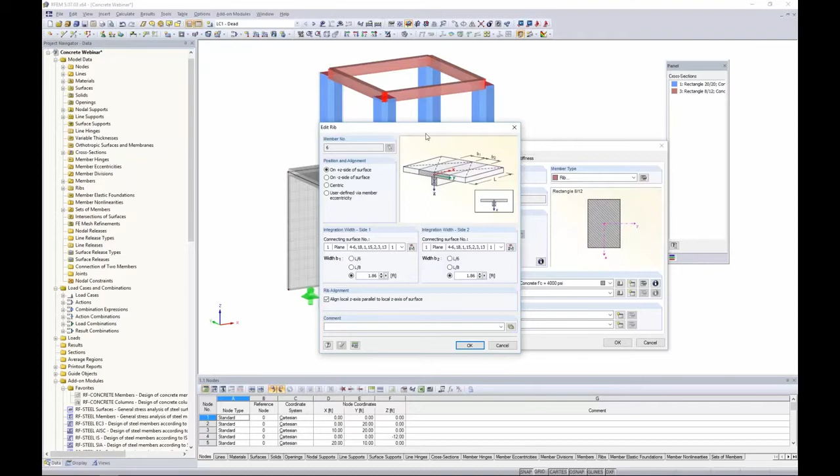And what's nice about the rib is that if we go into the edit member types here, we can define where to exactly place the orientation of this rib in comparison to the surface that it's related to. So we don't have to manually put in these rigid links to drop it down below the surface. The program will automatically calculate that for us.

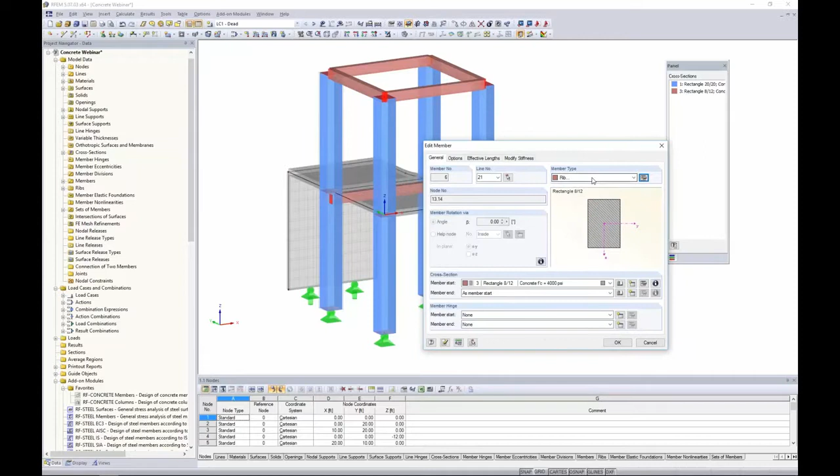Now what we can also do is automatically set the effective widths: L/6, L/8, or we can enter in some user-defined option here. So it's nice that the program does have this member type as a rib, which is used quite often for concrete members. So you can see here that I've already defined all of this criteria.

And the last thing to notice about these members in particular is that if I take a look at these columns, for instance, I right-click and I go to Edit Member. Under the Modify Stiffness tab, this is something that needs to be done for concrete members. Typically, the default will look like this, definition type none. And what you want to do when you are doing design according to ACI, you will see the drop-down here according to ACI 318-14.

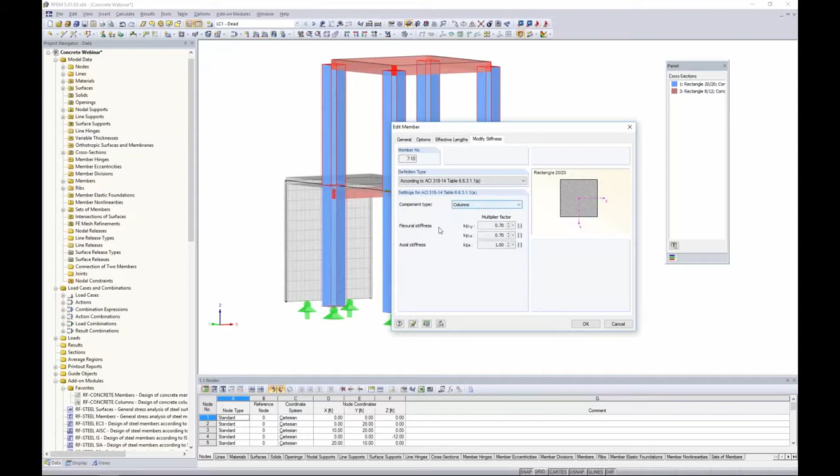If you click on this, this should look familiar. We have our component types: columns, walls, beams, and flat plates. Then you'll see these multiplication factors for our stiffness to take into account cracked cross sections. Anyone who's done concrete design, you're familiar with this. This is the way to take it into account in the program.

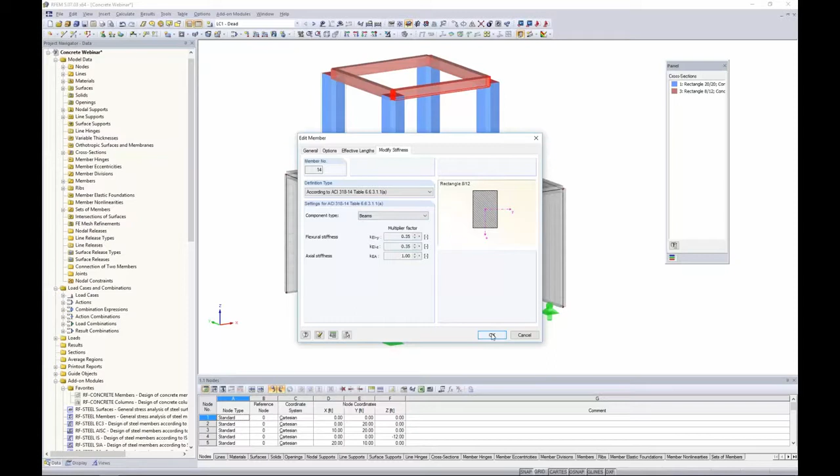And then obviously for our beams, for example, we have the exact same setting according to ACI, but I've selected the beams here. Now this multiplication factor will be slightly different than what it is for columns, which is why we give you this other drop-down box to define the element. So remember to do so for your concrete design. This is not done in one of the modules, but it's actually done in RFEM.

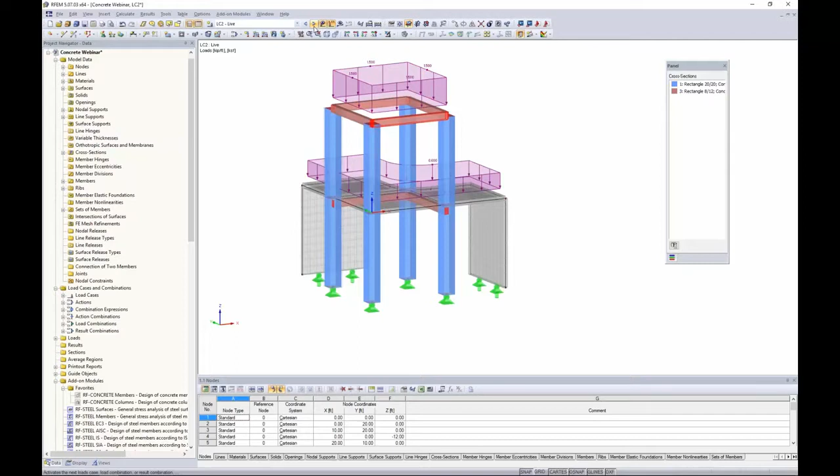The other thing to notice is that I went ahead and applied some loads here already. We have our typical dead load, surface load here. I put some line loads at the top members. Same thing for live load. And lastly, I put in a lateral load, wind load. I just applied it as a line load as well to what we can call maybe our first level diaphragm here, as well as our second level to these beams.

So we can also take a look at our different load combinations that were generated. If we go into our load cases and combinations dialog box, we'll see here our different load cases: dead load, live load, wind load. But more importantly, we're interested in these load combinations. Now, the load combinations were generated according to ASCE 7. We have all of our LRFD load equations listed here, only applicable to those load cases that we defined. We also have our ASD load combinations listed here as well.

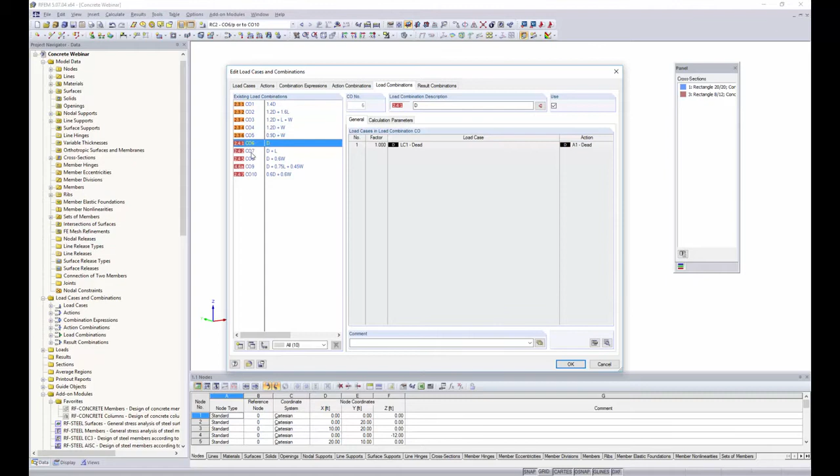Something to note, it is default in RFEM to run these load combinations as second order analysis, or P-delta. So you can individually change these if you'd like to something such as linear analysis or large deformation analysis if you have things such as cables. But for now, we want to keep it as P-delta effect so that we are doing our member design according to P-delta.

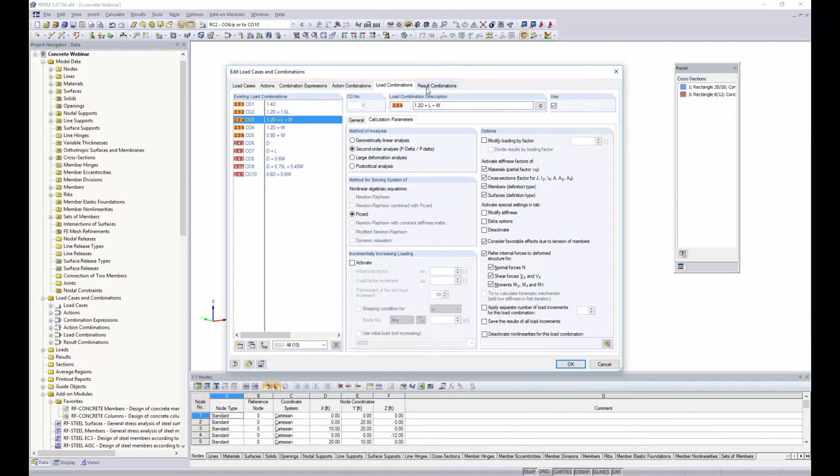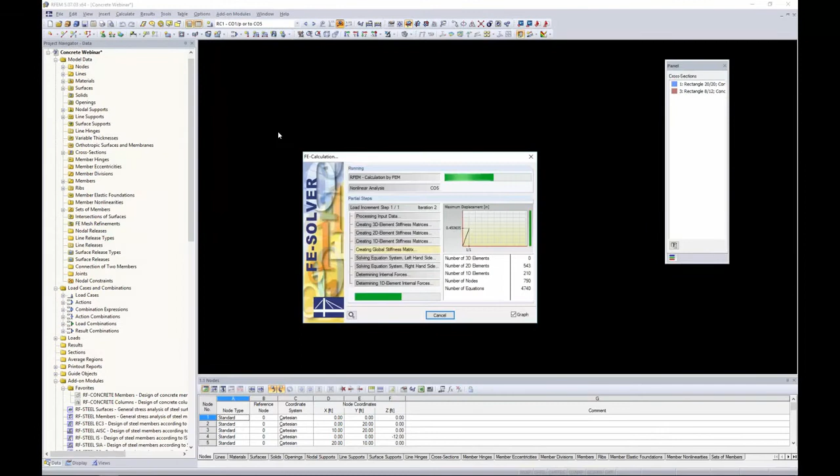We also have the results combination. This is nothing more than an envelope solution. You can see that we have the envelope solution for all of our LRFD equations and the envelope solution for our ASD equations. And with that said, we can go ahead and run our first analysis with our result combination 1. And you'll notice that this is nonlinear analysis. As I was saying, it's P-delta. It solves rather quickly, and we are given the envelope solution for all of our LRFD equations.

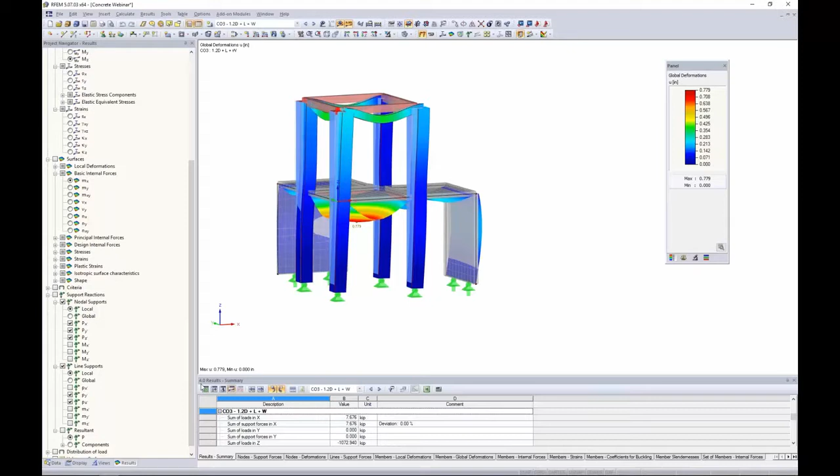Maybe I want to jump to something more like load combination 3 here, 1.2 dead plus live plus wind. We can see our deflection is given at 0.779 for our slabs. We have deflections of our members. So what I was telling you is that in RFEM, all of these analysis options are available in RFEM alone. Our results tab popped up here. This allows us to maybe view our members, and I can turn this into wireframe mode.

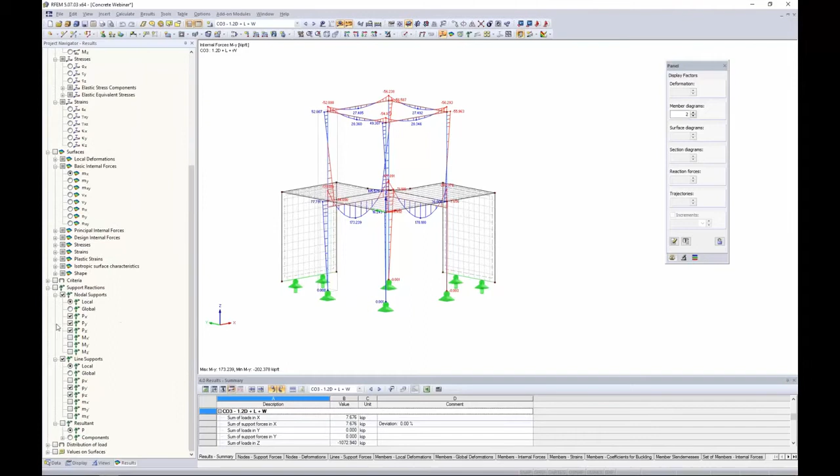Our member internal forces, such as our normal forces for our columns. Maybe we want to take a look at our shear forces, moments, for example. We can always increase this diagram to make it a little bit more visible here, and you can print this off. So everything according to our analysis is complete. Support reactions is something else that I mentioned you can easily show. I just have some simple pin conditions and some pinned conditions at the bottom of our walls as line supports as well.

So that's basically the extent of RFEM. So now for concrete design, this is where our add-on modules come into play. The first way to access these add-on modules, there's a tab up here called add-on modules. The options are a little bit more clear here in this list. Steel are grouped together, concrete are grouped together. So I could certainly access them through here.

Back on our project navigator and our data tab down here at the bottom, this is our long list of add-on modules. You can always right-click and add it to your favorites to move it up to the top of this list. I prefer to access it through here only because it's just a little bit quicker than going to this drop-down, but it's completely up to you.

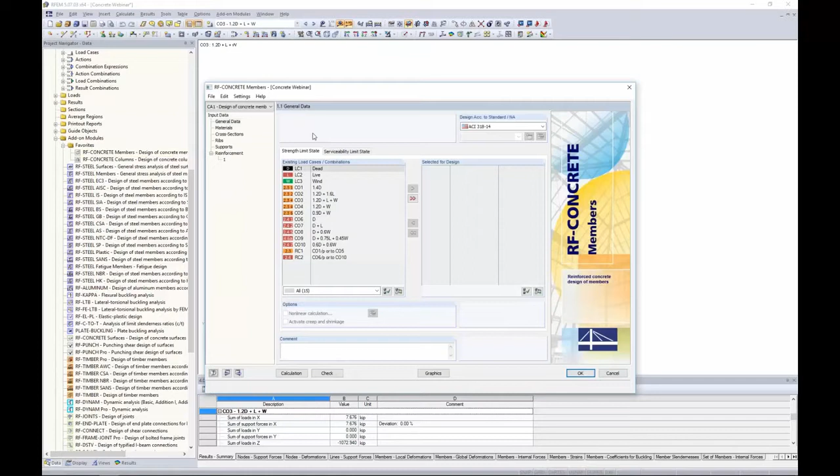So the first thing that we want to do is to jump into our RF-CONCRETE Members. So something to note here. This is our add-on module. Avid RFEM users are used to this dialog box, but for others who are not familiar with our program, this is just a simple dialog box within RFEM. All of the materials, the cross sections, the loading, everything is taken from RFEM into this add-on module. So you don't have to worry about redefining any of that information. The add-on module is purely used for code design.

So you can see here that we have design according to ACI 318-14 selected. Now the first thing the program asks us is what load combinations do we want to select for our strength limit state. We will probably use our LRFD equations for this scenario. That's pretty common. Now serviceability options, we will choose our ASD load combinations. That's typical as well for crack widths, and for deflections we want to choose our ASD load combinations.

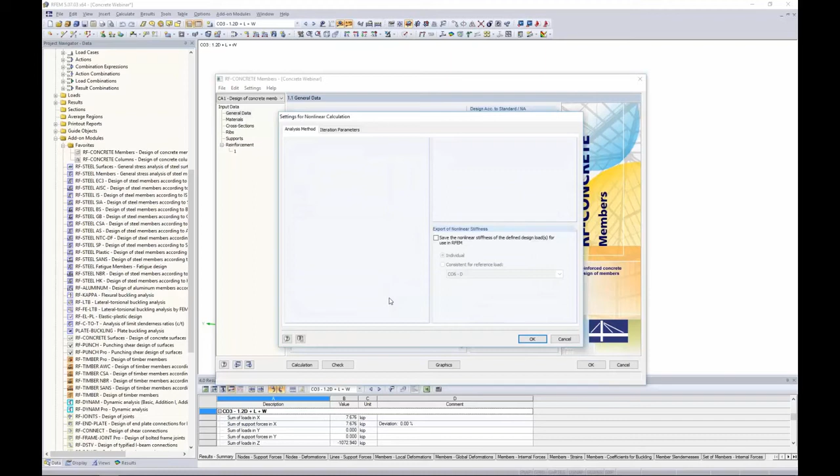Down here, you'll notice under our serviceability, we have nonlinear calculations. This is if you want to take into account creep and shrinkage. I'm not going to get into this today, but this does require our additional add-on module, CONCRETE NL. So if you are wanting to take into account cracked sections with creep and with shrinkage, this is certainly an option here. But like I said, I won't be getting into this today. We will just be sticking with the typical linear elastic analysis.

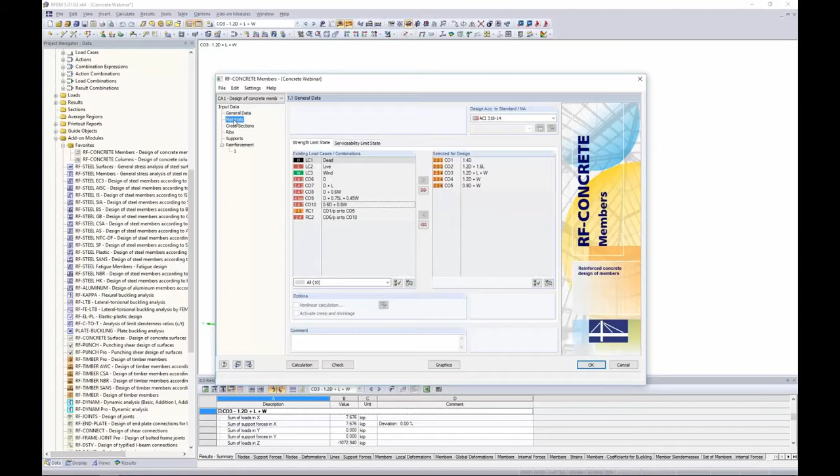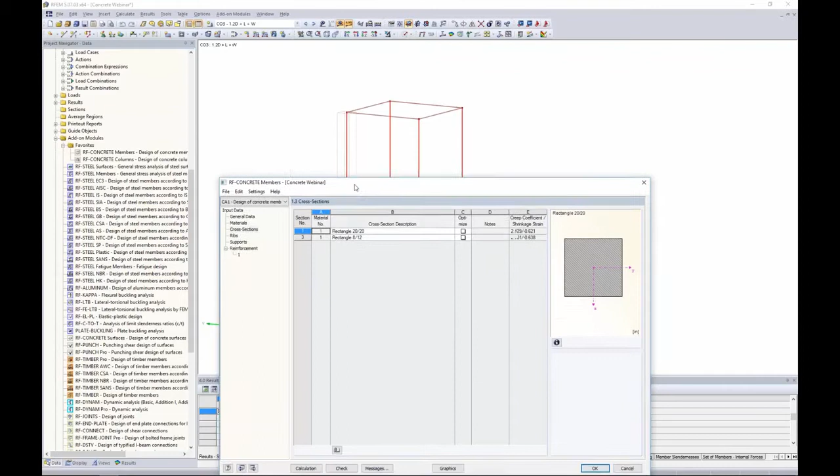Materials, as I mentioned, our 4000 psi f'c will be taken from RFEM. We have reinforcing steel grade 60. You can view the diagrams here for stress-strain for both our concrete and our steel. All of the parameters are given here. Cross sections. We have the cross sections taken from RFEM. And let me exit out of this, turn this back into the rendered mode.

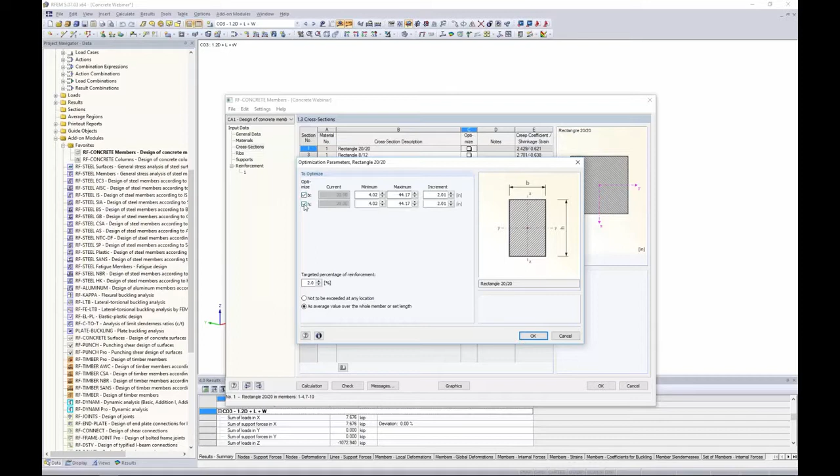And going back into the dialog box, under our cross sections, it's nice because as we click on these different table rows here, the members that are applicable to this particular row will highlight in the RFEM model. So everything is synced together. We do have the option to optimize. If you want to get the best design, the most economic design, all you need to do is just check this checkbox. You can set target ranges for your width and your height, B and H. You can also set a target percentage of reinforcement.

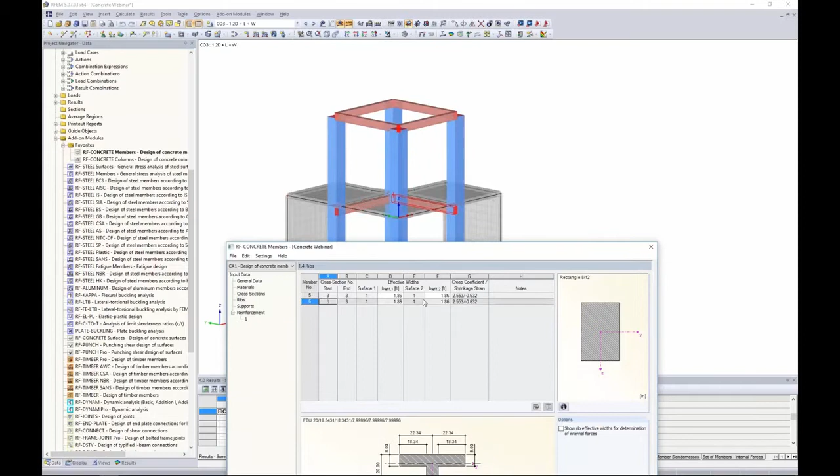Sorry, I'm just double checking one other thing. Okay. Now, moving on down the list, we have our ribs cross section. This is the ribs category. You'll notice it highlights as I scroll through these different members back in RFEM. These are the ribs that we defined at the beginning in RFEM that I was showing you. The effective width is taken into account, how we set it in RFEM. You can always override this directly in the add-on module as well.

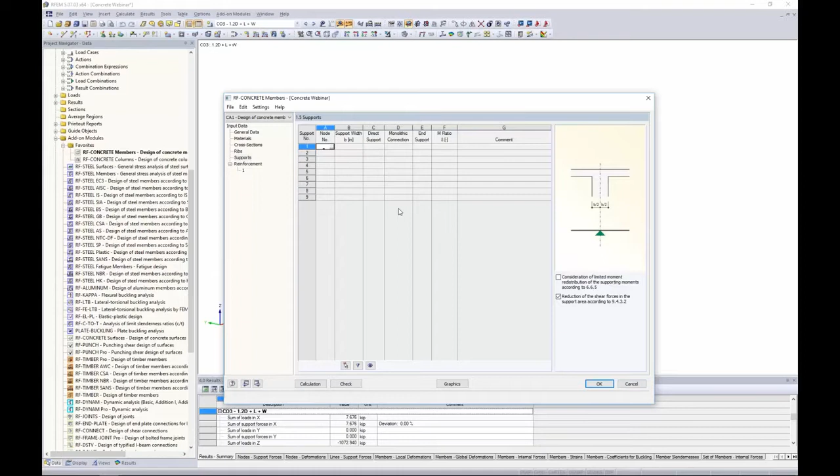Supports. Supports is something important because in the code, when we're doing something like shear design, for example, the code says you can take the required shear force a distance of d away from the face of the support. Now, in RFEM, and this is true for any finite element analysis program, members are just 1D member elements. They're modeled by their center lines. So we have no idea what the face of the support is.

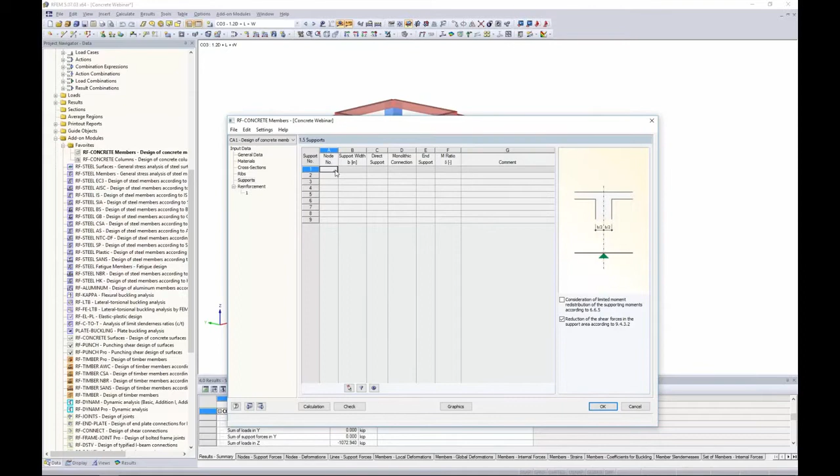And what's great about this add-on module is that instead of over-designing for a shear force that is much too high, we can specify these particular supports. All that I need to do is maybe I'll start with these nodes up here, and I just highlight. You'll notice these 4 nodes are now highlighted in red. I click OK. They're all available in this list here. Take note of this picture.

As I change things within this table, this picture will automatically update. So support width. Our columns are a width of 20 inches, so I'm going to set my support width to 20 inches. For avid RFEM users, you may not be aware of this, but if you do press the F8 button, it will quickly fill in these cells according to what was previously entered.

Direct support. This is self-explanatory just by looking at this picture. If I unselect this checkbox, this shows me that the beam is framing directly into that support. If I check it, it looks like it is a continuous beam resting on top of that support. For our case, we'll keep this as a direct support. Monolithic connection, is it 1 concrete pour or is it 2? Again, shown by this picture.

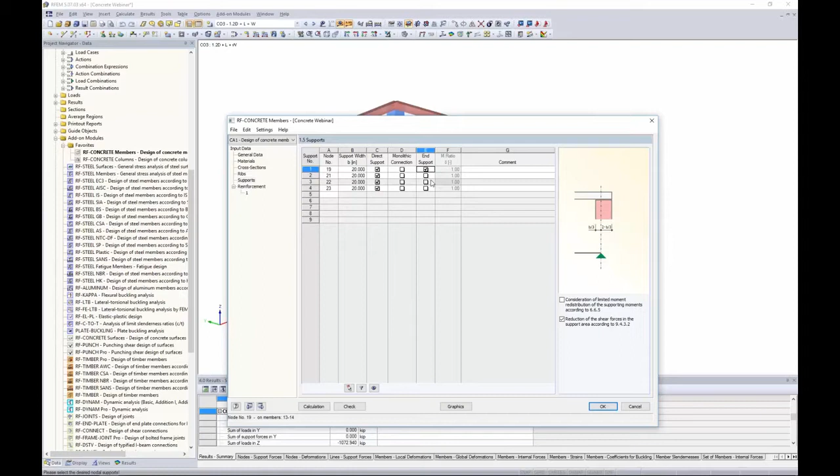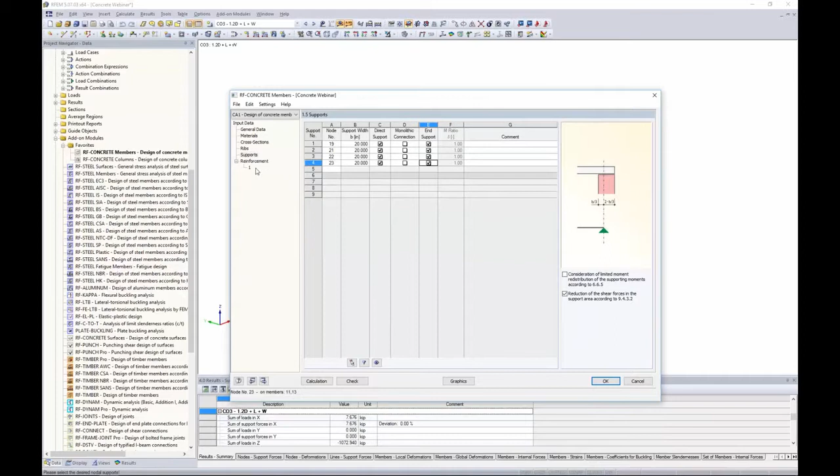End support. Is the beam continuous over the top of the support, or is this an end support condition? For our supports, they are an end support, and you'll notice the red arrow points to which node number I'm looking at. Again, this is great for large models. I don't have to guess, oh, okay, well, I don't remember what node 23 is, go back into RFEM, but everything is synced together.

So now we jump into reinforcement. This is a little bit more lengthy than the other options that we've seen so far because we have a lot of code references and things to take into account according to the ACI for reinforcement design. The first thing the program asks us is if we want to define more than one reinforcement group. This is important if you have a lot of members. Of course, they're not going to have the same reinforcement layout. So you can create as many groups as you'd like, and you can give them different description names.

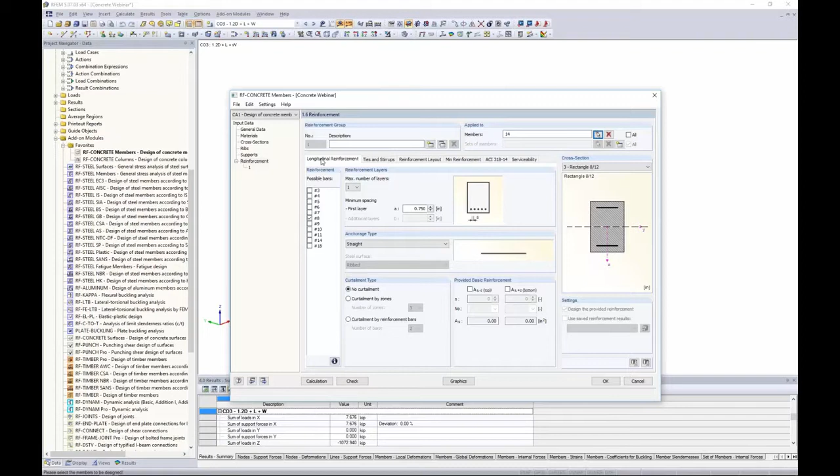For us, we just have one description that we'll go ahead and define here. Applied to which member. So if you have many different reinforcement groups, you can apply them to different members. For the purpose of this demonstration today, I'm just going to select one member for design. Then we jump down here to our first tab, longitudinal reinforcement. What bars are possible for our reinforcement design? Well, let's say I want to choose maybe 5, 6, and 7 here. I'm not really sure exactly what will be needed, but we'll start with something like that.

Max number of layers, this is pretty self-explanatory. If I want more than one layer, as you can see here, it's possible. Probably more important for larger beams when you're taking on larger loads. For our case, we will just have one layer. Something else that I would like to point out is the minimum spacing for the first layer. We have a user-defined entry here.

So what we can do is refer back to the code, and this is chapter 25. The minimum spacing for our longitudinal reinforcement must be the greater of the values of 1 inch, the diameter of the bar, or 4/3 times the diameter of the aggregate. I have no idea what the diameter of the aggregate is. Probably as an engineer you might know that information, so of course you'd want to take that into consideration, but we do not in the program have an entry for that. 1 inch will probably be controlling here because I do have smaller bar sizes under a 1 inch diameter.

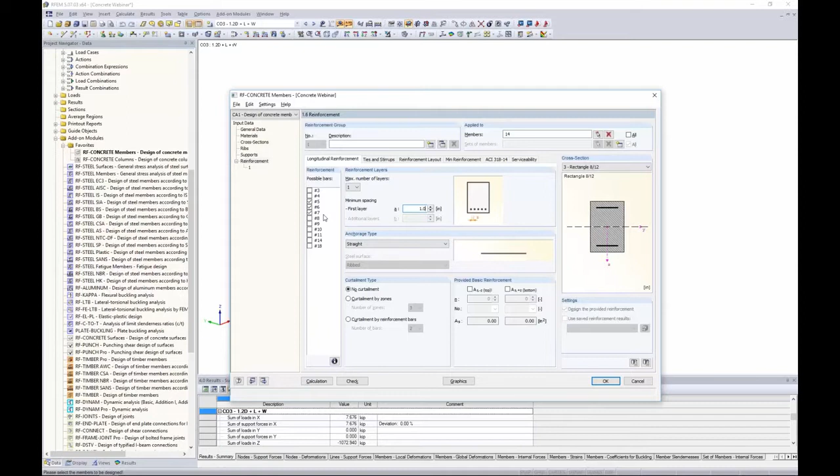Anchorage type. So anchorage and curtailment, I'll talk a little bit in more detail here. The anchorage type, we have every different option that you could probably consider. It's updated with this picture here. You'll notice we can take into account transverse bars. Maybe we just want a typical hook. For us, we'll just keep this as straight. Steel surface is grayed out because the code does call that all steel surfaces must be ribbed.

So the other entry that we need to consider here that RFEM is doing in the background is the development length. The program knows whether the bars are in tension, compression, if they're a standard hook in tension, and it will refer to the code chapter 25 for all of these varying equations to make sure that these development lengths are correctly taken into account.

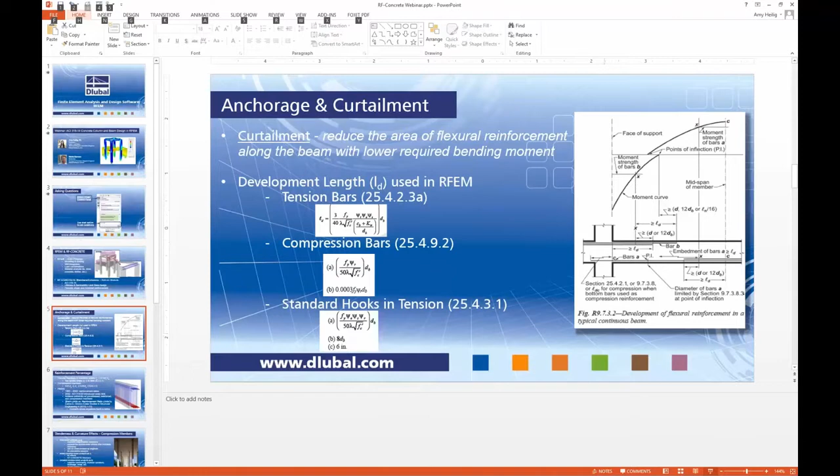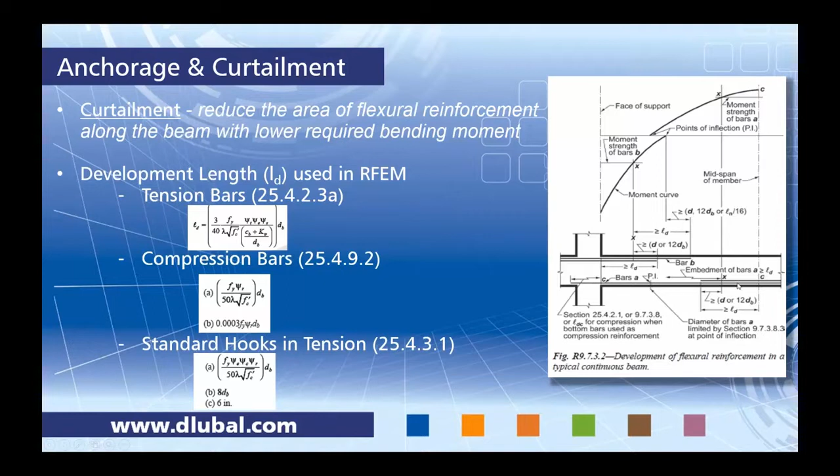Back in the PowerPoint, this is taken directly from the code, figure 9732, and this is exactly what we're talking about. Towards the face of a column, we have more of a negative moment. We have a very low moment in between here, so maybe we don't need as much reinforcement. This would be a situation where curtailment could be used, and then we're getting into higher positive moments towards the middle span of the beam, which will require reinforcement on our bottom. For our case, we'll just leave it to no curtailment.

Provided basic reinforcement is great for structures that already exist, where maybe you already know the top and bottom area of steel. Here you can set that by defining your number of bars, defining the bar diameter, and the program will automatically consider this as provided basic reinforcement.

If this reinforcement does not meet the needs of what the design is calling for according to the ACI, the program will tell you that we are considering this provided basic reinforcement, but we also need to add additional bars in order to meet the requirements of our bending moments.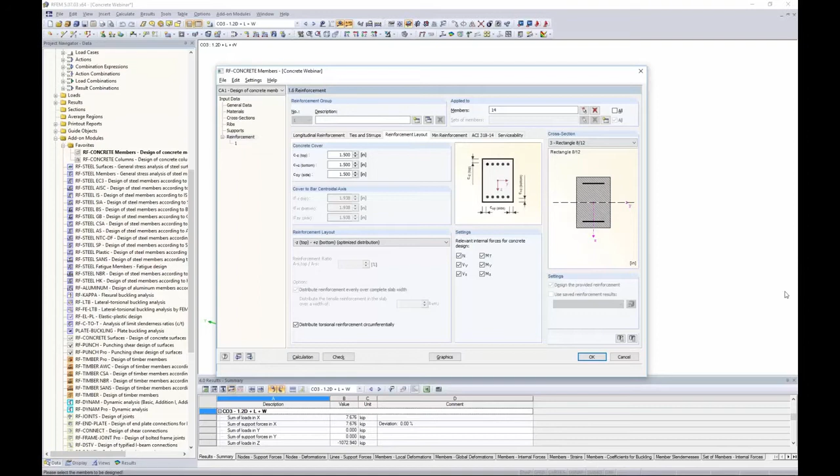Reinforcement layout, concrete cover. This just comes from Chapter 20, Table 20.6.1.3.1. We can consider our concrete cover here. Keep in mind that as I scroll through these, you'll notice that this picture is synced up, so it's nice that you know exactly what you're looking at.

This is clear cover, the distance from the edge of the concrete to the edge of the reinforcement. Shear ties are considered in this as well. This is why the cover to the centroidal axis is grayed out, because as I adjust this to maybe 2 inches, the cover to the centroidal axis will be adjusted as well based on what we put in there for possible bar size.

Reinforcement layout. This is just how you want the layout for your top versus your bottom longitudinal reinforcement. Do we want it optimally distributed? Maybe we want a symmetrical distribution so that the top is the same as the bottom. We also have options to define the spacing or layout based on ratios of our top steel area over our total steel area, or define it as bundled bars in the corners with uniform surrounding, which is more typical for columns. For us, we will keep it as optimal distribution for our longitudinal reinforcement.

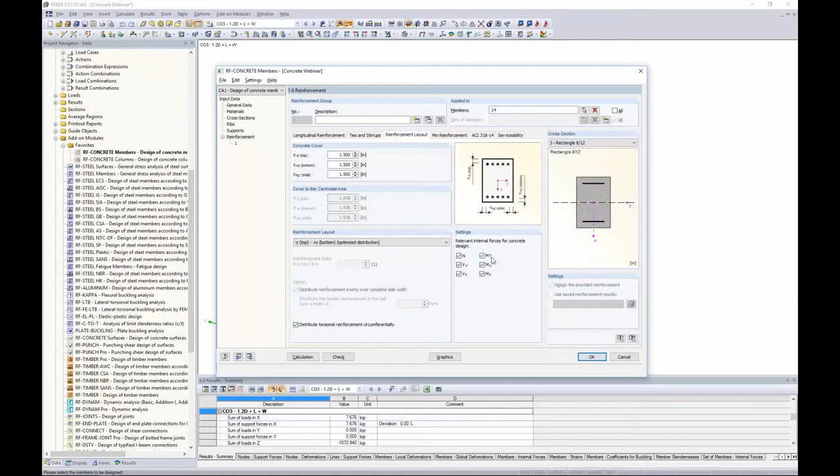Settings. These are the internal forces that the program is designing for. We get asked quite often, do we design according to torsion? Yes, we do. You can see here we take into account bending moment according to torsion. We also obviously design for our shear and moment as well as our axial forces.

Minimum reinforcement. We have two check boxes here to take into account minimum longitudinal reinforcement according to the ACI, as well as the minimum shear reinforcement according to the ACI. If you have a user-defined minimum reinforcement, you just click on this button. You can define the number of bars, the bar number, and the program will take that into account as well.

Secondary reinforcement is for any reinforcement beyond what is required structurally. So if you are looking to put in a little bit more reinforcement than what is required, this is where it will be done under the secondary reinforcement option here.

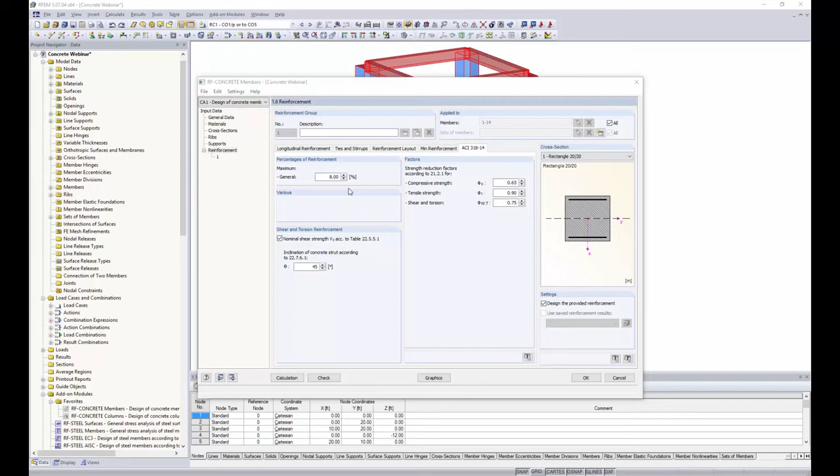ACI 318-14, percentages of reinforcement. You can see the default is set at 8% here. This is something I'd like to go into a little bit more detail. We'll jump back to our PowerPoint here.

The code tells us that for flexural members and members where our axial load is less than 10% of the concrete strength times the gross area of the concrete, our net tensile strain must be greater than or equal to 0.004. This comes directly from the code, Chapter 9, Section 9.3.3.1. Now, compression members or columns, we are given a reinforcement percentage. So our steel area must be greater than 1% of the total area, but less than 8% of the total area. This is explained further in Chapter 10, Section 10.6.1.1.

A little bit of history about this. From 1963 to 2002, reinforcement ratios were used despite it being a compression member or a flexural member. We always used these ratios that you're used to down here for columns. Then in 2002, the ACI introduced strain limits, which is what you're seeing according to Chapter 9, 9.3.3.1 up here. The purpose was to achieve uniformity with pre-stressed, reinforced, and compression members.

I actually pulled all of this information from the journal Case Studies in Structural Engineering. There's an article in there, Strain Limits versus Reinforcement Ratio Limits. What's interesting is that if you're an engineer used to these reinforcement ratios pre-2002, and the net tensile strain isn't very intuitive to you, this professor has converted these stress equations back into ratios. What he found was that there really was no difference. When we convert them back to ratios as a percentage of the gross area of concrete, it really comes close to the net tensile strain being greater than or equal to 0.004. Something worth checking out if you're interested.

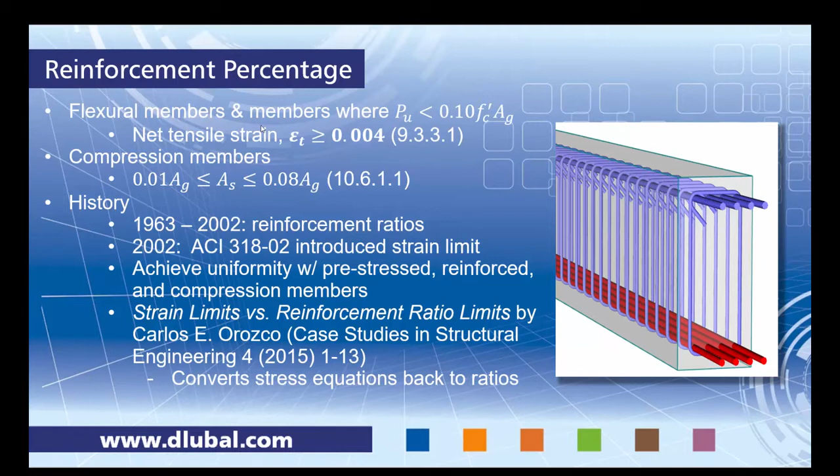With that, we can jump back to RFEM. Back in RFEM, we do have this set at 8%, but keep in mind, according to the code, for our flexural members, we need to check our tensile strain after our analysis, because realistically this is irrelevant if we are not meeting the code requirements for the tensile strain.

Shear and torsion reinforcement, we have our nominal shear strength according to Table 22.5.5.1 in the code. Then inclination of concrete strut, this is related to our torsion. The default is 45 degrees. You can certainly put in another angle, and for more information it's probably best to refer to the code, Chapter 22.

Factors. Pretty self-explanatory here. If you've done concrete design, we're all familiar with our strength reduction factors. It is in Chapter 21 of the code. These right now are set to what the code calls for.

However, you certainly can change those if you choose to do so. But keep in mind, if you are doing design according to the ACI, then you will be following the code for these entries.

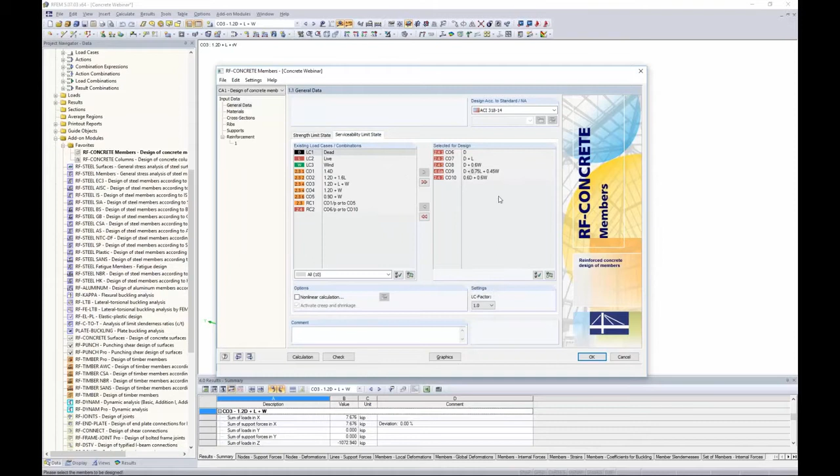Serviceability. This serviceability tab is only available because, back in the General Data tab, we defined our ASD load combinations for serviceability. If I defined no load combinations here, if this was empty, I would not have this serviceability option. So if that's missing, it's probably because you didn't define any serviceability load combinations.

Crack analysis. We have options here to limit the value for allowable crack width based on a couple criteria. The first option is limit values, and in this drop-down box, the ACI did some studies on various exposure conditions and came up with a limiting crack width that approximates what the max crack width should be. For example, if you're in a water retaining structure, your crack width is much smaller than if you're in dry air. For us, maybe we'll stick to something like humidity.

The structure is in, maybe down south where it's quite humid. Same for the bottom, so our crack allowable width is 0.012. You also have the option under user defined to just type in whatever you'd like. But we do need to give it some type of limit so the program knows to flag it if we are over those limits.

So how exactly do we determine what the crack width is? What's interesting is the ACI does not give you an exact equation for how to calculate crack width. Basically in chapter 24, it tells you to limit the longitudinal spacing so that you can decrease your crack width, and that comes from this section in the ACI.

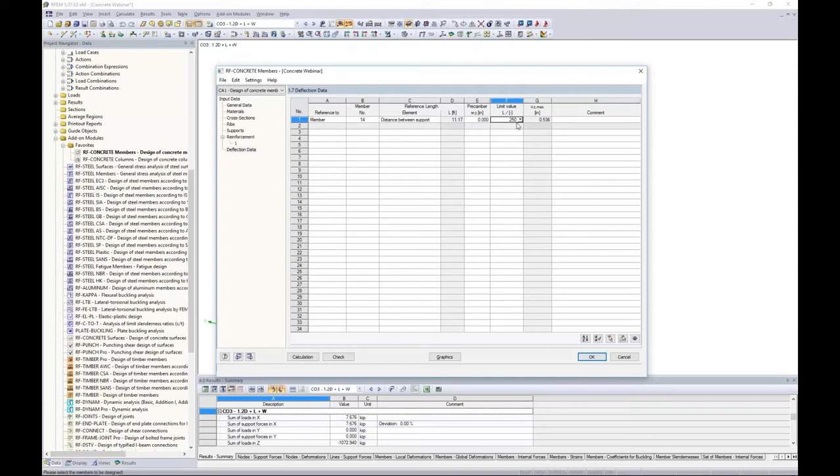Back here under serviceability, we also have the option to activate long-term deflection according to 24.2.4.1. This is just a table in the code that will take into account in the calculations for deflection the duration of the load, and we can set the number of months here.

So with that said, I think we are finally ready to run an analysis. Now all I need to do is just click calculation in this add-on module, and what it's giving me now is reinforcement design according to ACI. You'll see here that now all of this reinforcement, or this results section, is available.

The first thing to look at is our required reinforcement. In this table, we will see basically the summary according to cross sections, or maybe we want to view it by member. Because we only defined one member here, we're still just looking at member number 14, so it doesn't matter. We're getting basically a summary of our reinforcement. We have our reinforcement at the top given, our longitudinal reinforcement at the bottom, and then we have the reinforcement for required longitudinal torsion. You'll notice this is set to 0, so this is only applicable if we have some torsion within this beam.

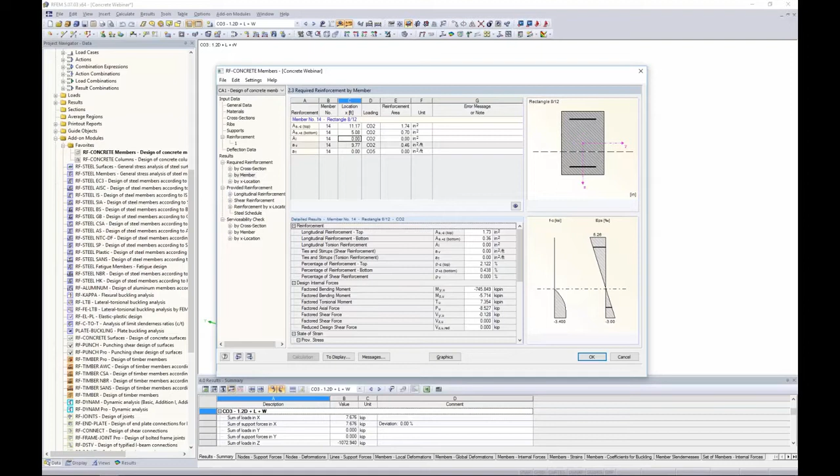Then we have our shear reinforcement, and lastly our stirrup reinforcement for torsional moment. Again, this is 0 because we don't have much torsion in this particular beam.

As I click through these different options, my stress strain diagram updates here according to my cross section. This is something else I really want to emphasize. There are a lot of other programs out there where you simply don't know where your numbers are coming from. I really think RFEM is such a strong and powerful program because we always try to give you as much information as possible. This allows for very few tech support calls and emails saying, I just don't understand where these numbers are coming from, because we list all variables here.

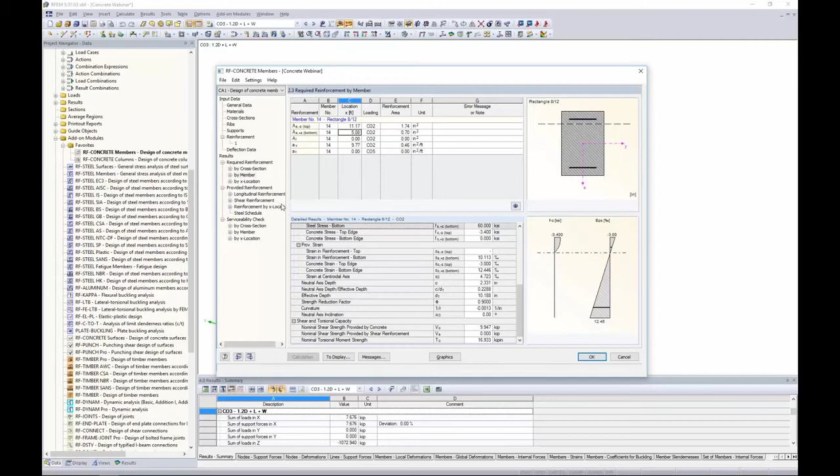We give code references where we can, so you can really understand where those numbers come from. We can also view the required reinforcement by X location. What's nice is that as I'm scrolling down through these different options, you'll notice this red arrow updating depending on where I'm at along the length of the beam. So for large models, this is beneficial so you can really understand what you're looking at. Again, we have the long list here that updates as we scroll through to show all of our variables and how we came up with these numbers.

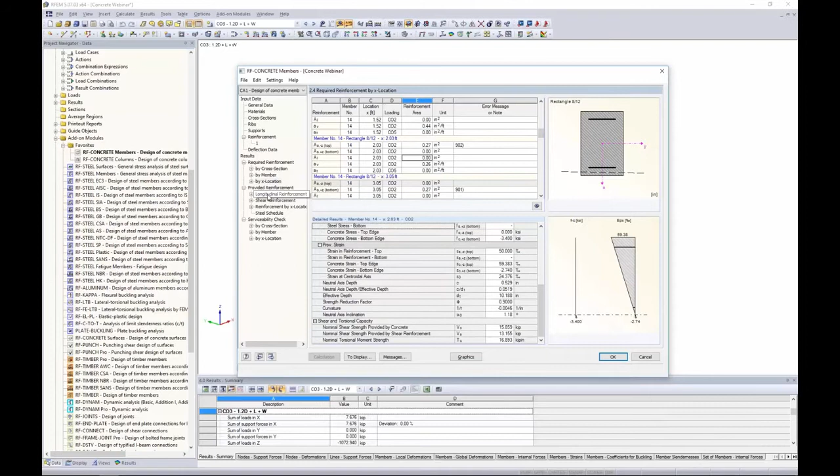So now that we know our required reinforcement, the program needs to give us some sort of design, and that's where this provided reinforcement comes into play. The first tab here is our longitudinal reinforcement. In order to meet the required reinforcement, the program has set 3 number 7s at the top here and 3 number 5s at the bottom to meet those requirements.

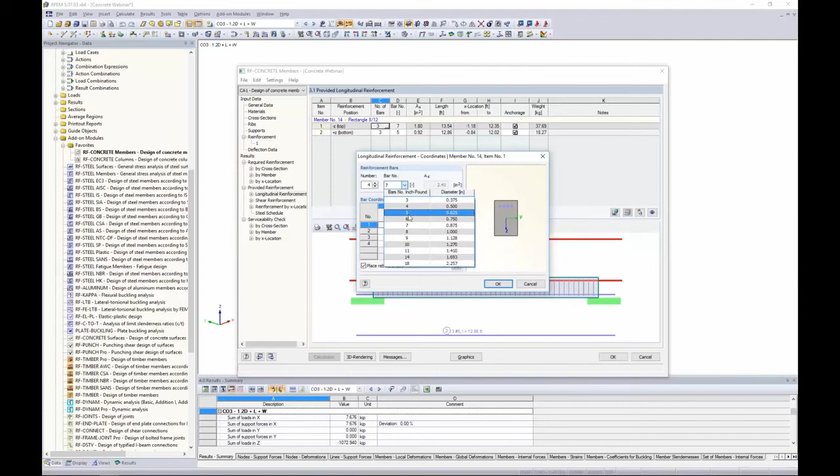What's nice is that if you take a look at this and think, I'd really prefer not to use number 7 now, I can easily click in this table here. I can increase to 4 number bars, and I'd like to use number 6s. I click OK, and click on any of these other tabs, and the program says, wait a second, you changed your values for number of bars and bar size, I need to recalculate. So you quickly recalculate, and the program will update only what's applicable to the changes you just made. A very quick and efficient way, rather than jumping back into this reinforcement to force the bars the way you'd like them.

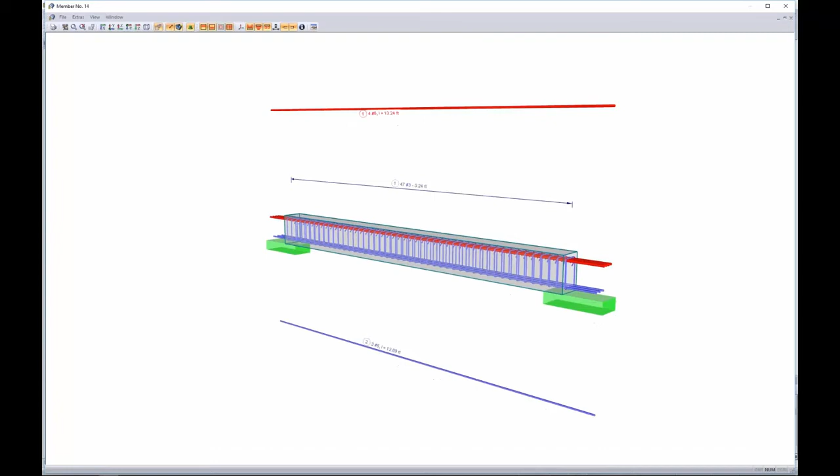What's also interesting is we get this nice picture, but if I double click in it, I get the 3D layout of my reinforcement. You can see I have my longitudinal reinforcement shown, I have my shear reinforcement, and it even shows the development of my shear reinforcement. I'm given the callouts for bar sizes as well as the number and spacings. I have control to turn on and off any of these reinforcement bars, and this is great for printing purposes.

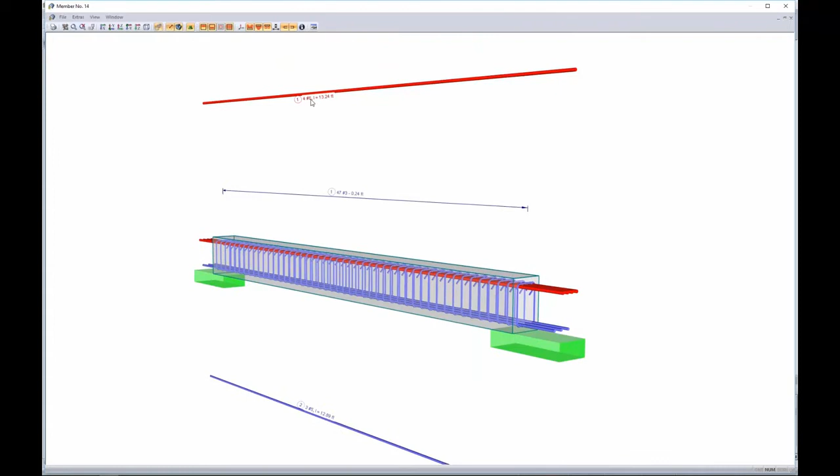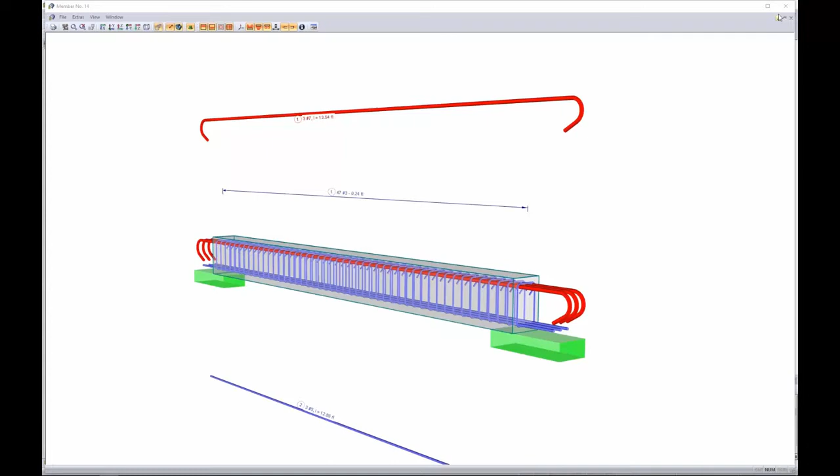Just like in the tables, if I think, never mind, I want to go back to 3 number 7s, I can double click in here and I'm given those exact same options you just saw in the table. This is a great and efficient way to quickly make changes. Maybe the anchorage type I decided needs to be a hook instead of straight. I click OK, everything is automatically updated. So I click out of this picture, maybe click on another tab, the program says, hey, you made changes, let's recalculate. I recalculate, and it recalculates only those bars that had changes so everything is updated in our results.

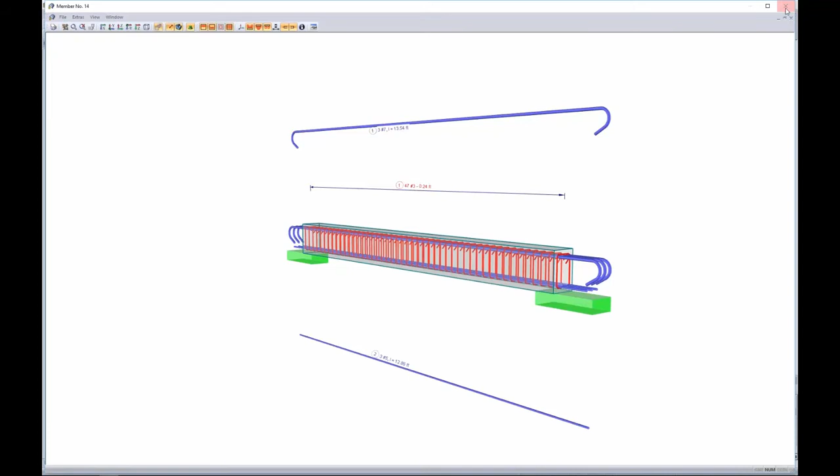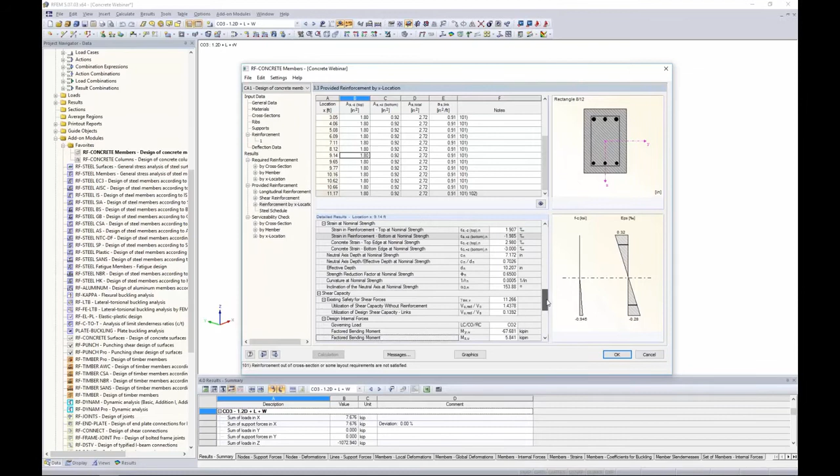Reinforcement by X location, basically just a summary here along the length of the beam. Again, this nice red arrow shows us where we're at. We get a summary of our top and bottom longitudinal reinforcement as well as our shear reinforcement. And then, as I always like to mention, here is our list of any variables and equations that went into calculating this reinforcement.

Lastly, we have a steel schedule. This is your material takeoffs, which a lot of us, of course, are interested in the total steel.

Serviceability check. This just relates back to the crack widths and the deflections. You can see that according to the deflections, we have a ratio of 0.41, so we are under those limitations that we did give it under the deflection data back here. Now we have our spacing limitations, which I mentioned the code calls out for cracking. And we also have the ratio according to the Gergely-Lutz equation, which you can see here is calculated in comparison to the limiting crack widths that we also gave it in this criteria.

So we can view it by cross-section or by member. Again, same scenario since we're only doing one design here, and of course by X location. Something else to notice in any of these tabs, you'll notice this notes section. If you see any numbers here and click on this messages, it should correlate to any warnings or just information that the program would like to give you about your reinforcement design. For example, this says 334, the effect of the bending moment MZ is not considered in the given deflections. So this is important if you are seeing those numbers to just quickly take a look at the messages.

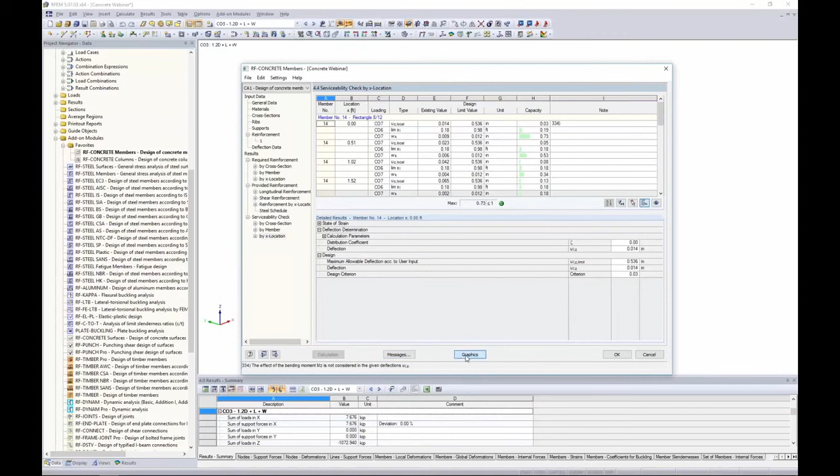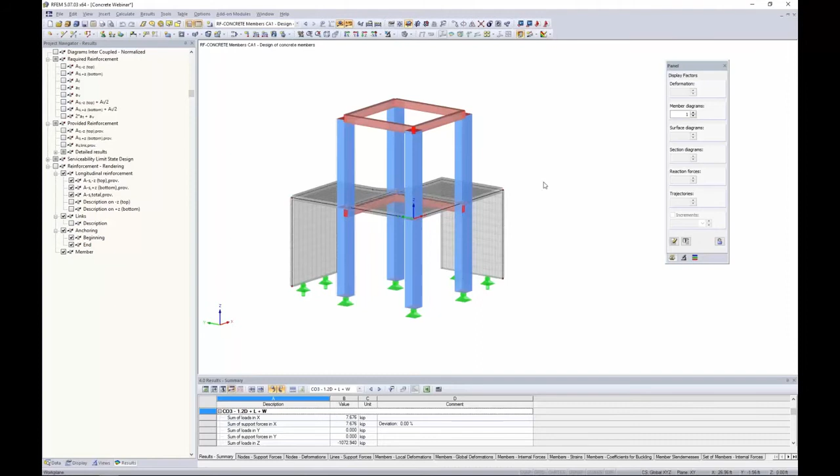And the other thing that we can do is we can view everything graphically here. So once I click graphics, you'll notice in my drop-down box here, I have another option called RF concrete members. Now in my results tab, I no longer have all of the internal forces from RFEM. I can easily jump back to those, but now I'm looking at the results from my concrete module. I can turn this back into wireframe.

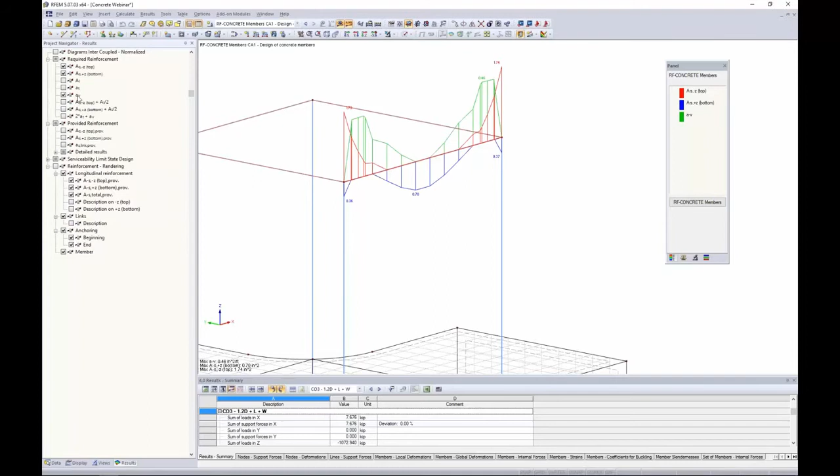Maybe we want to take a look at our top and bottom reinforcement. This is nice. Maybe we want to add this to some pictures, and you have all of these options to view this graphically as well. Sometimes this makes a little bit more sense than viewing things over and over again in a table just to reiterate what exactly is going on. You can see here shear reinforcement, and actually you can even show that nice rendering picture that we were viewing directly in the model. Again, maybe good for printing purposes just to show you how things are related here to the rest of the model.

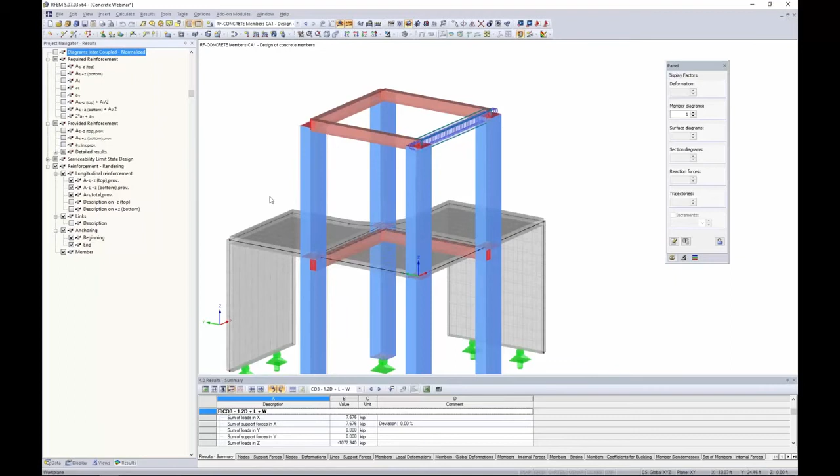So with that said, that basically sums up our beam design. Now we want to jump into our column design. And before I do that, I want to go back to the PowerPoint because this is something that is very important in regards to column design. So we often get asked, okay, do you design columns according to the moment magnification procedure or second order analysis? And this is where I really want to clear up what's going on in our add-on modules. The code in ACI 2014 says that we have 4 different options to account for slenderness and curvature effects for our compression or our column members.

The first is a first order analysis according to section 6.6. This is purely a linear first order analysis. Now, second order effects are taken into account with our moment magnification procedure. So those of you who've done column design probably are very familiar with the moment magnification procedure. Basically, this will just increase our moments to account for those second order effects. What's great about the moment magnification procedure is that you as the engineer can easily cross-check these numbers in comparison to the software. When we're getting to a little bit more complicated analysis, it's not that easy to cross-check by hand calcs, but with this option, we certainly can do so.

And first order analysis with moment magnification is taken into account in RF concrete columns. So this is the module that I will show you guys next. Again, to reiterate, first order analysis, RF concrete columns. Now, the second option the code gives us is elastic second order analysis. This is chapter 6, section 7. This is P-delta effects. So this is done in the add-on module we were just in, RF concrete members.

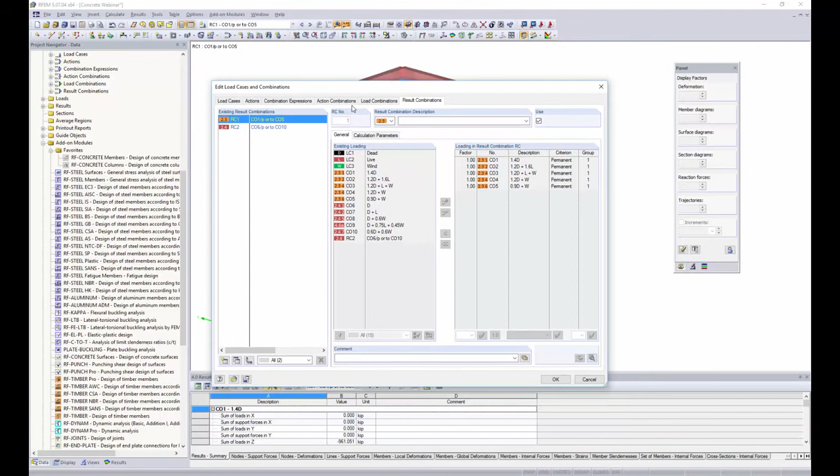So what I want to show you guys is how to exactly deal with this. So back in RFEM, this is in RFEM, not the add-on module, we want to go to our load combinations dialog box. As I previously showed you, all of these load combinations are according to second order analysis. What we actually want to do here is to select all of our load combinations and choose geometrically linear analysis. This is important so that we don't account for second order effects in RFEM, then we go into our RF-CONCRETE Columns and we again account for second orders with moment magnification.

Now the program is smart enough to throw up a little warning saying, hey, you are accounting for second order effects twice. Now realistically it's not that much of a difference if you choose to do so, but it will still warn you that you are accounting for them twice. So for the sake of this, to correctly take into account moment magnification, we want to change all of these load combinations to a linear analysis. Now, if you are jumping back and forth between beam and column design, maybe you want to make a copy of these load combinations, set half of them to linear analysis and set the second half to second order analysis. Then you can individually assign those load combinations in these separate add-on modules.

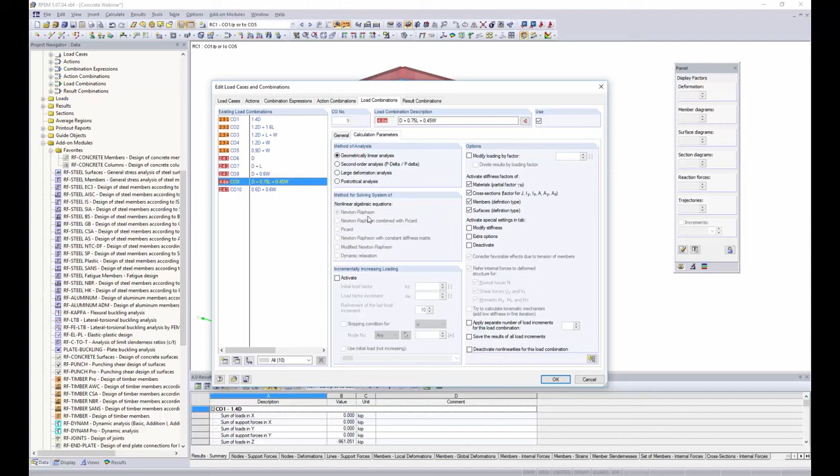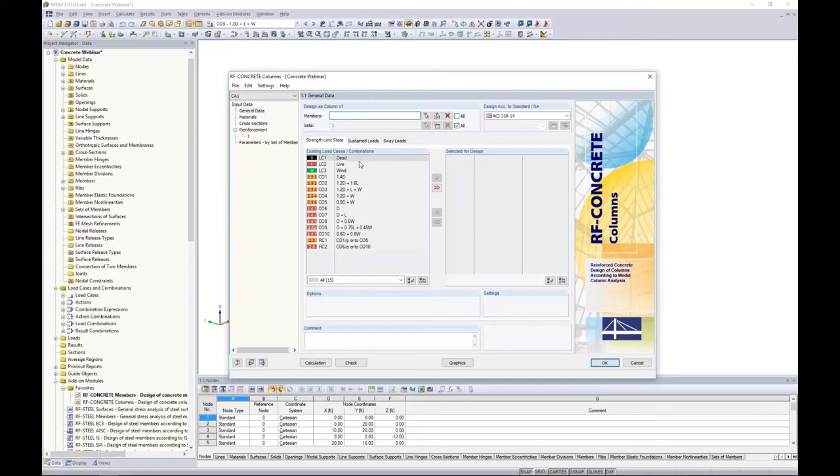So now that that is done, we can go into our concrete columns and take a look at our design loads here. So now all of these design loads are ready to go with a linear analysis taken into consideration. So here, this module looks very similar to what we were just in, but you'll notice we're in the concrete columns add-on module here. We need to define the members or the sets of members. If I go back and I turn this into wireframe, you'll notice these two columns here, and it has this dotted line around it.

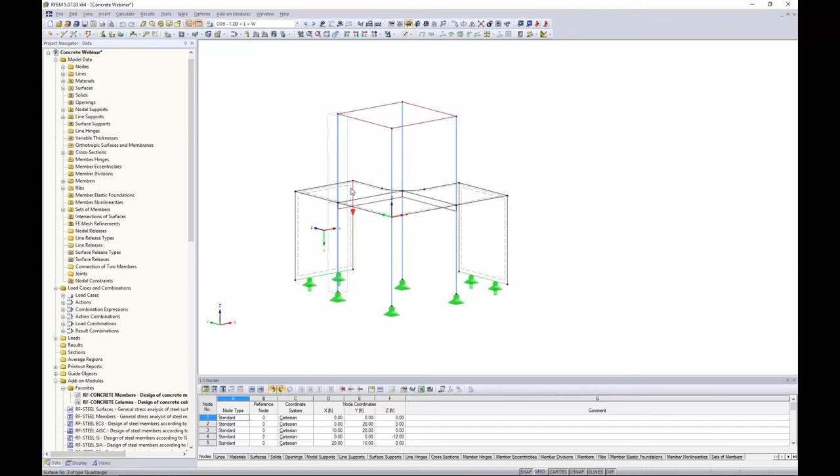This dotted line means that it's a set of members, and the reason why I did that is because we probably want to design these two columns to have the same reinforcement, maybe the same size, maybe they'll be cast as one continuous member, whatever it is. We probably want the same design for all of them. So all I need to do is just select both of them, right-click, and then here I can create a set of members. This is a continuous member now. So when we're back in this add-on module, instead of designing each individual member, I have the option down here to design according to my member set. So I'm going to design according to this single member set here for the purpose of this example.

Strength limit state. I am going to choose my LRFD equations here. And then we get into our sustained and sway loads. And this gets a little bit confusing because this is obviously very different than just our typical strength and our ASD load combinations for serviceability. So going back to the PowerPoint, I do expand on this a little bit further.

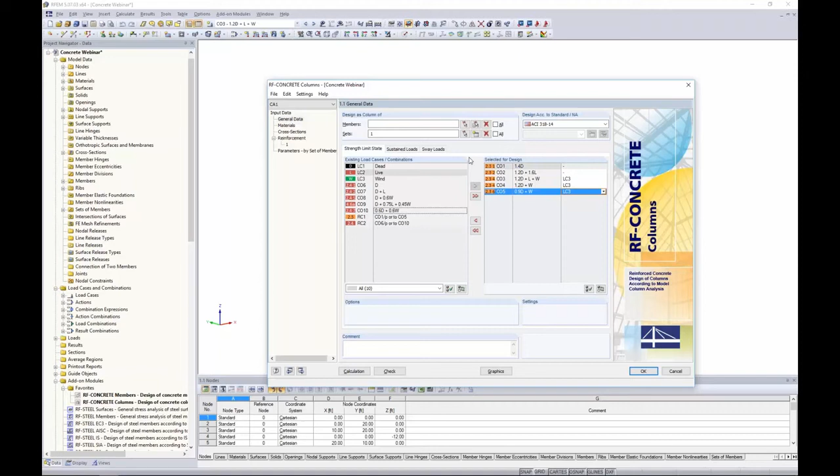And the reason why, and this is very important to remember, is that back on the strength limit state, we now have this drop down available, and we need to choose which loads in this load combination are used for sway purposes. So here you can see I'm selecting load case 3 for wind. This is what I put under my sway loads. It's now available in this drop down. So that's just a little bit about why we have these different tabs. They really do affect the moment magnification procedure.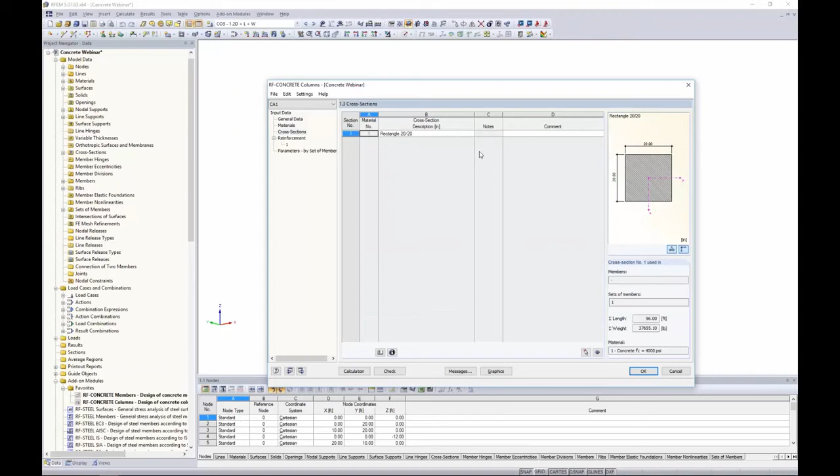Materials. Again, a lot of this is just going to be repeat information from the previous add-on module, so I'm not going to spend a significant amount of time. Materials is taken from RFEM. We have our cross sections. You'll notice we don't have the option here to optimize, so just something to keep in mind within this concrete columns. And then reinforcement, again, we just choose the reinforcement type that we would like to consider.

The layout is typically uniformly surrounding for columns. Anchorage type, again, we have straight, hook, bend. We also have the option to consider steel surface such as zinc coated or epoxy coated. This will be added in our other add-on module fairly soon as well because it does affect your development length. Ties and stirrups, same concept as before. We'll select number 3 and number 4 to be considered. Secondary reinforcement, again, this is just any reinforcement beyond what is structurally needed. For us, we won't consider this.

Reinforcement layout, you have the option here to define your cover according to the centroidal axis or the edge of the rebar. I always like to choose the edge of the rebar. It just makes a little bit more sense to me. And then the centroidal axis will be updated considering your shear reinforcement as well as half the diameter of the longitudinal reinforcement. The program also asks us the bar number to be considered for preliminary design. Well, maybe I want to choose the most economical, number 4, for example.

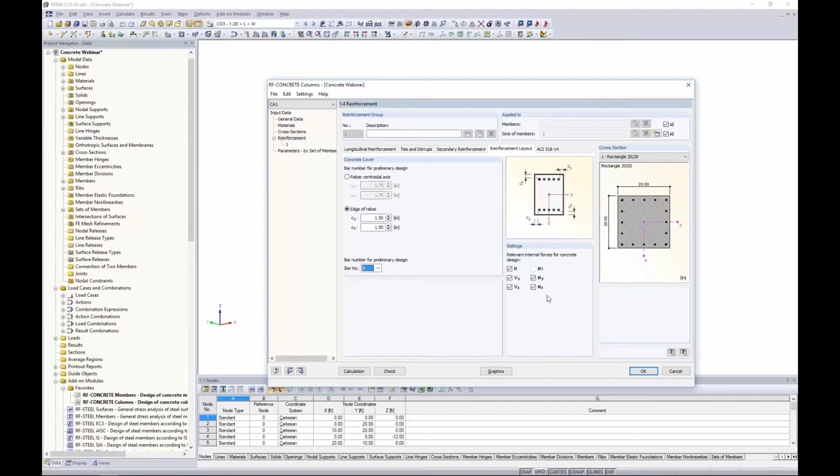Relevant internal forces for concrete design. You'll notice here we do not design for torsion within this add-on module. So if torsion is something you want to consider for your columns, you would need to do so in the concrete members with P-delta effects and that sort of application. In the code under the column sections in ACI, it really just says, hey, if you have torsion that exceeds a certain amount, refer back to the beams. So that's why we really don't have an option here to design for torsion, but it is possible in RFEM itself.

And lastly, ACI 318-14. This is all the exact same stuff that we just saw previously, giving our longitudinal reinforcement minimums and maximums, our strength reduction factors according to the code, as well as our shear reinforcement. Notice that torsional reinforcement is not considered here.

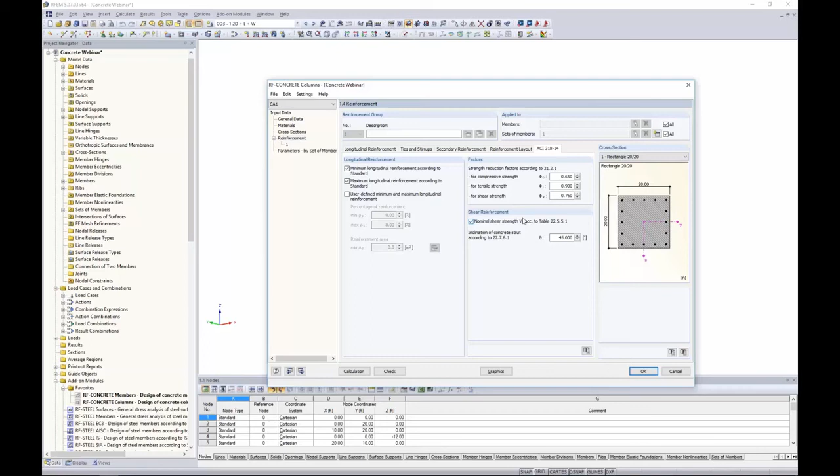Parameters is something that is lastly important for the moment magnification procedure as well. Here, we choose if we want to consider buckling about our Y or Z axis. And by the way, if you are not sure about your Y or Z axis, you can always right-click on your members and turn the local axis system on.

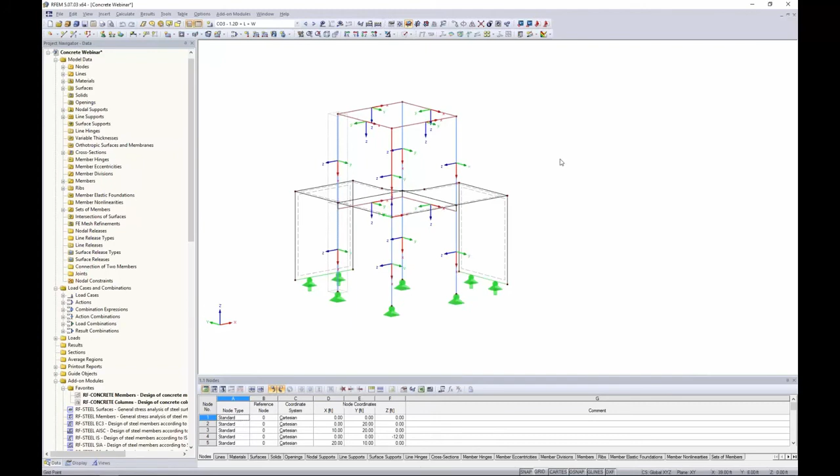So now we can see what direction is Z and Y. We can even turn this into a rendered view so that we can view, if we didn't have a square column, what exactly is going on with our local axes.

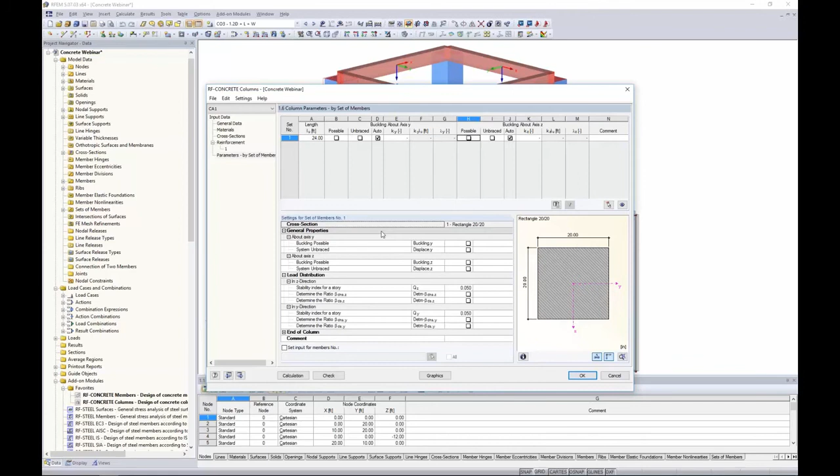So with our parameters here, we want to define if buckling is possible. Is it unbraced or is it braced? And the program will automatically calculate these K factors according to the code. You know, we have those different charts in the ACI that will calculate these K factors, and the program takes all of those into account. Same thing with buckling about the Z-axis. For this option, I'll just leave this unchecked for now just for simplicity. Again, all of our information is given here in the tables down below.

So now we're simply ready to run a calculation. Should be basically what you're used to seeing in the other add-on module, but now we have a set of members that we're designing for. The first thing that pops up with our results is our check, our set of members. So you'll see here that we have our design ratio, and we have the code reference immediately available here. This is really nice, so you know exactly what's controlling overall for this particular column design.

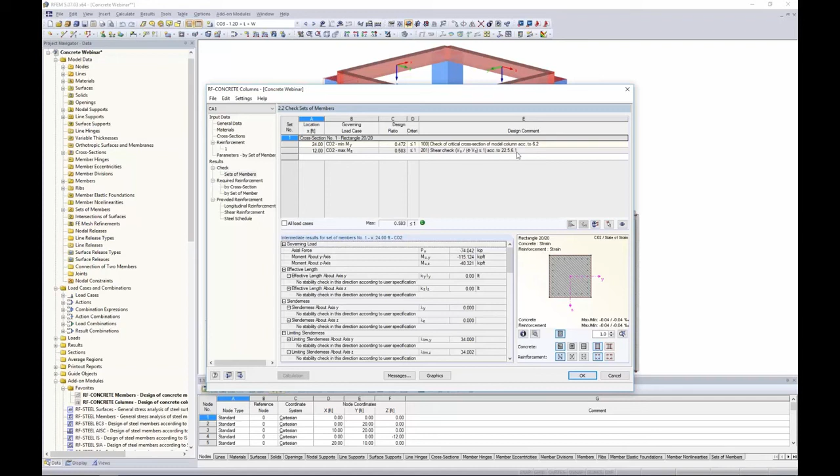Right now we have a check of critical cross-section of the model according to 6.2. Our shear check is according to 22.5.6.1. We have our nice green smiley face because we are below 1. And as I always love to point out again, everything is available here in our table, all variables that came into play with any of these checks and code references where they're applicable. So again, not a black box type program, but anything that you'd like to know how this came into account for the calculations, we try as best we can to put it into the program.

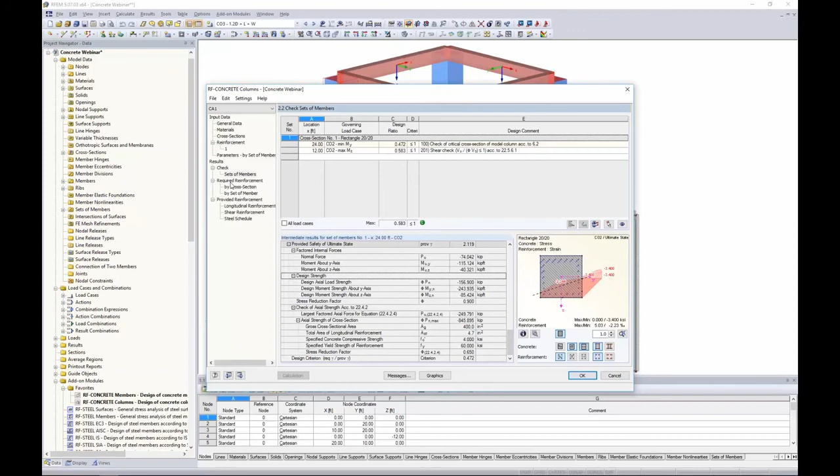You also have these little pictures down here. We can view the stress diagram of the concrete. We can give it value. So if this is something you're kind of interested in, this is available here. Required reinforcement, this should look a little bit similar to our other add-on module. Obviously here we're only giving longitudinal and shear. We don't do torsion. We're just given the basic layout for those.

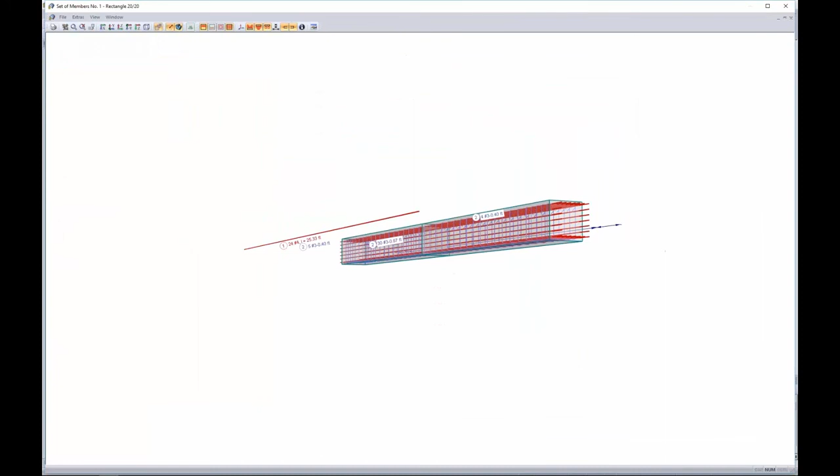And lastly, the provided reinforcement. This looks just like our picture for beams. We can double click. We're given a nice 3D rendering. Just like with the beams as well, we can double click on any of this reinforcement to quickly change it if we'd like to force it to be another size, another spacing, whatever else you please. And we can view everything graphically. As I mentioned with the other add-on module, same procedure here.

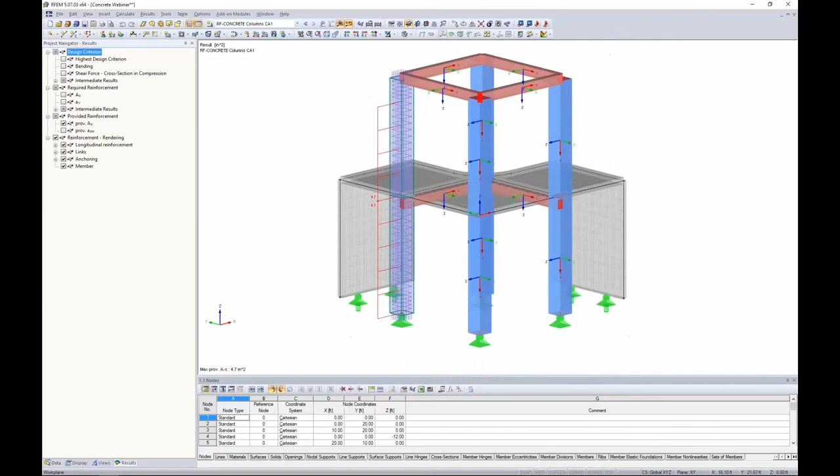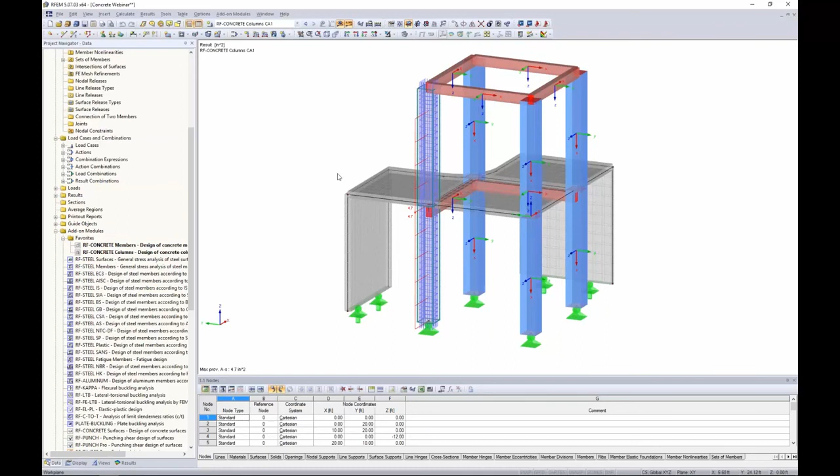So you can see there's really not a whole lot of differences between the members and columns add-on module. So it's nice. Once you get the hang of maybe beam design, you can also easily do your column design as well. But like I said, to emphasize, again, it all just depends on how you want to do your column design. Is it according to moment magnification? Well, then you would want to use the concrete columns. If you'd like to do it according to P-delta, then you would choose concrete members. So with that, that basically sums up the reinforcement design according to ACI for our beams and our columns.